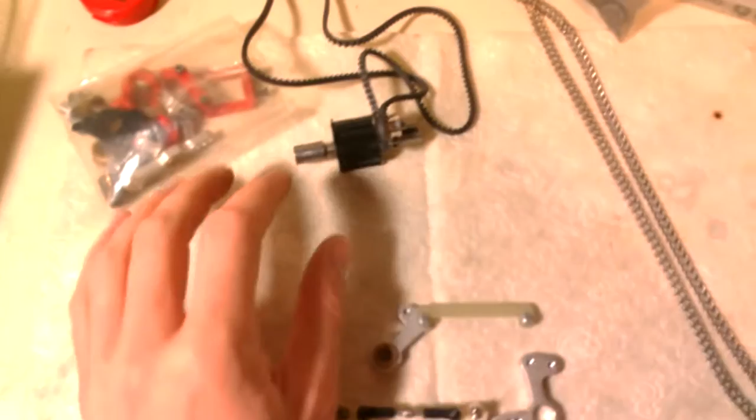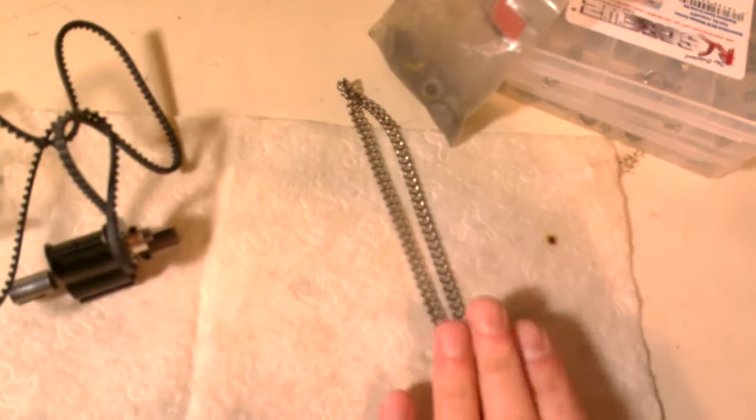As you can see, I have for the SP2 both the belt drive option and the chain drive option. I already did a belt drive conversion for the 410 Legend project, so what I'd like to do for this project is take the belt drive out and use the chain drive. The chain drive is much more rare anyway, so I figured it would be nice to do a build on that. I do have the parts for this—not just the chain, but also some extra sprockets that you use specifically for the chain drive. You just take out this little pulley here and mount those sprockets on, and you're good to go.

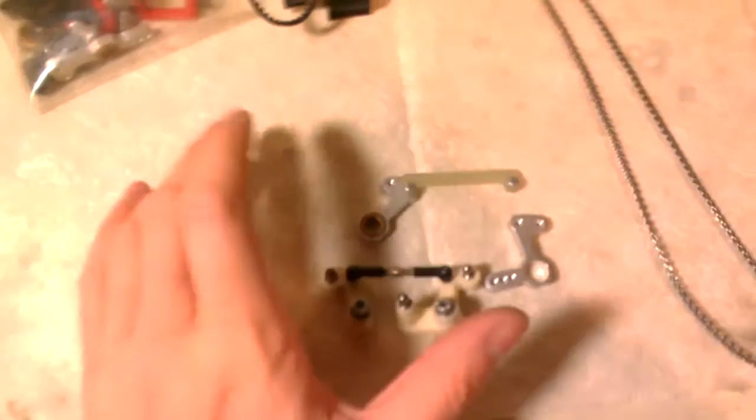So a few things to point out about the SP2 kit: this SP2 was released by MIP before the 410 Legend was released, and there were a few things they had you do to the chassis which were obviated with the 410 Legend. Let's see, actually I'll go to this right here.

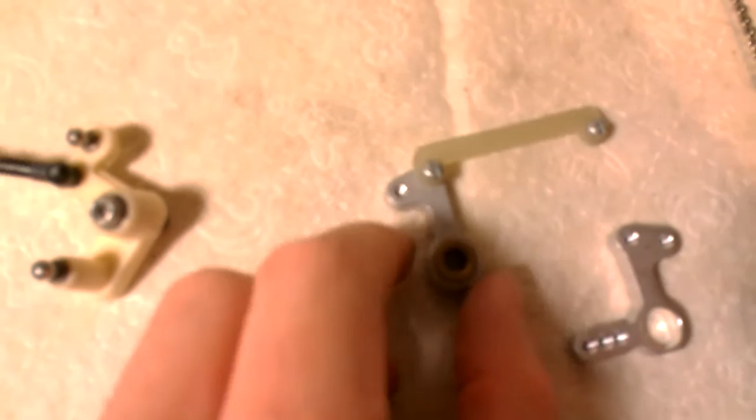One of the things they did is with the SP2, it was assumed you would keep the stock steering rack, which has a specific arm length extending out from where you mount the steering rack onto the little screws that go through the chassis. Because it kept that stock length, and because you're putting a gearbox on the front nose, you're reducing how much space you have left just for clearance for everything.

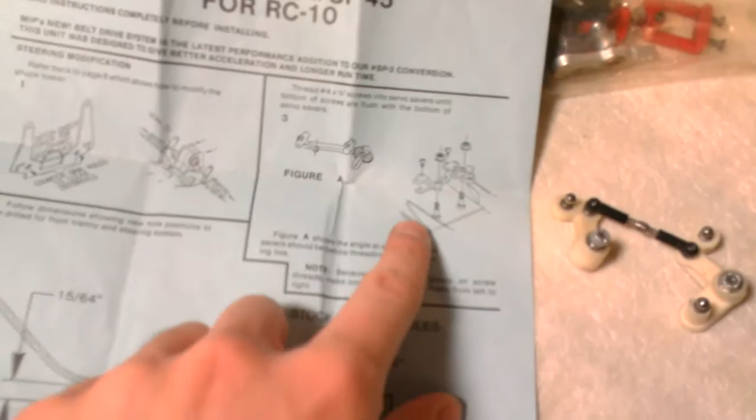So what they had you do was actually drill some holes that pull the steering rack back and spread it out a little bit, so that when you mount the gearbox, the steering rack can clear the gearbox. But now that you're pulling the steering rack back, you have to cut these sort of V-shaped openings in the chassis so that when the steering rack actually swings from side to side, it clears the chassis.

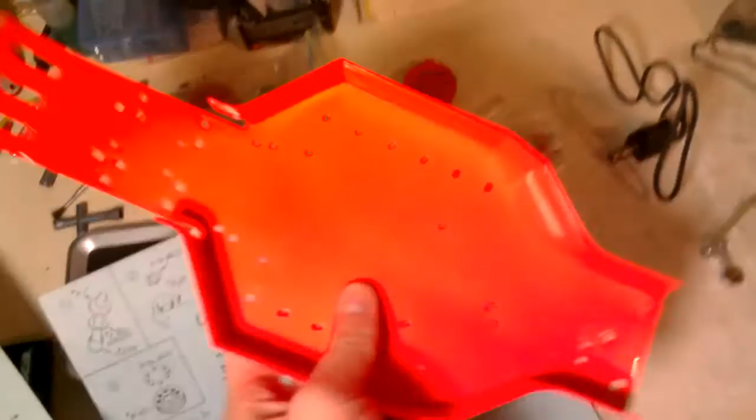And I would like to use this guy right here—this is like a hot orange colored chassis, powder coated for the RC10. I think this would be pretty cool to use with the chain drive conversion, and I'd like to find and use other parts that have nice matching colors to this.

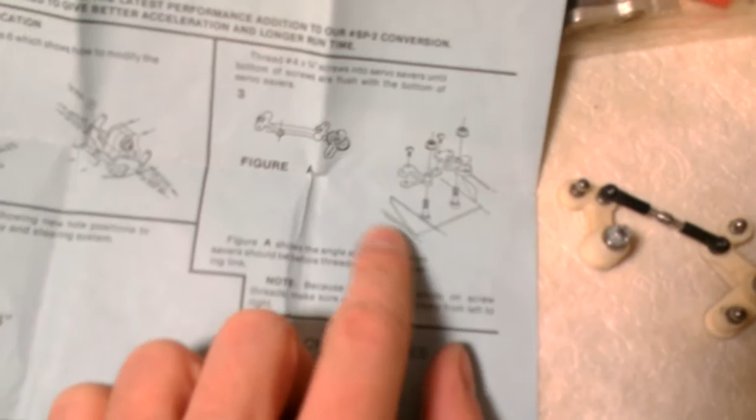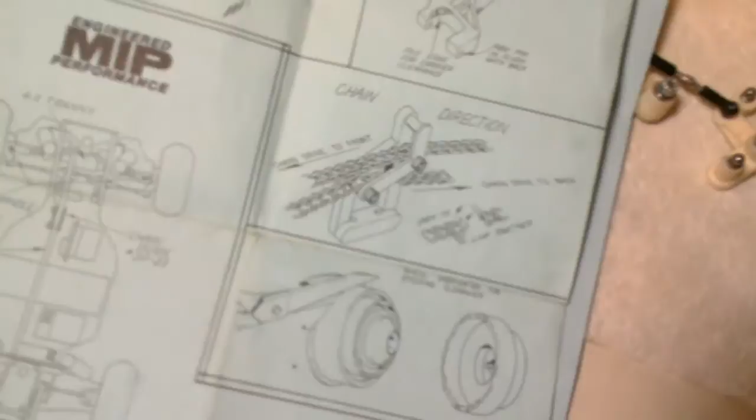But because that chassis is pretty uncommon, I don't want to have to hack it to bits to get this kit in place and drill these holes. The only holes I really anticipate drilling are these two right here, which you use to mount the tensioner that goes on the chassis. But other than that, I don't want to drill any other holes.

So what I'm thinking of, at least trying, is to use the steering rack from the 410 Legend. Because when the 410 Legend came out, they did not require you to drill any new holes in the chassis or adjust where the rack goes. They basically set up the way the front gearbox mounts and gave you a shorter steering rack so that everything clears without having to extend the nose or pull the steering rack back.

So I'd like to try this to see if it works with the SP2 kit. That way, again, I minimize any hacking I'd have to do to the aluminum chassis. We'll see how that goes—I'll test fit it, and if it doesn't work out, I'll have to use a different chassis.

I'll save that one for a different project. I have another World's Car chassis that I can cut up for this build if I absolutely need to. But that's just something to point out, to give you an idea of the difference in length here of the arm. If I just put these holes on top of each other, there's a slight difference—let me see if I can get this right here, where the ball stud actually mounts.

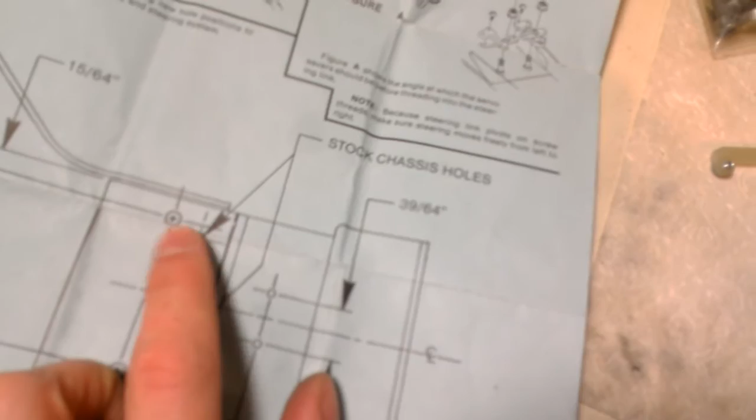So it's just a little bit further back, right? And if I put it on this arm here, it should be about the same type of offset. See, you can see the ball stud gets pulled back a little bit. Maybe this is comparable to the offset I have to use here, so I'll try it and we'll see how it goes.

Another thing to point out, with the 410 Legend kit, the front gearbox had a differential, but it wasn't a differential in the conventional sense. All it really was, was two one-way bearings, one for each of the left and right sides. So you didn't have a true differential, but for the SP2, it actually has a ball differential inside the front gearbox. In that respect, it's actually better than the Legend kit. I think that's kind of interesting.

So I'll have to take this apart, clean it up and everything, and put it back together. Another thing is, because I'm using the SP2 front gearbox, I thought it would be appropriate to get the SP1 rear gearbox that was made by MIP. So I found one of these on eBay, and I already took it apart for you just so you can see what it looks like on the inside.

It's kind of interesting, all the gears are metal. The diff gear is metal, the idler gear is metal, and the input gear is metal. And the diff out drives actually screw on with a little Allen key, or a grub screw. So you mount the gearbox, you put this onto the diff out drive, and you tighten down the grub screw, and that holds this in place. You do it for both sides. This whole assembly here is a metal gear.

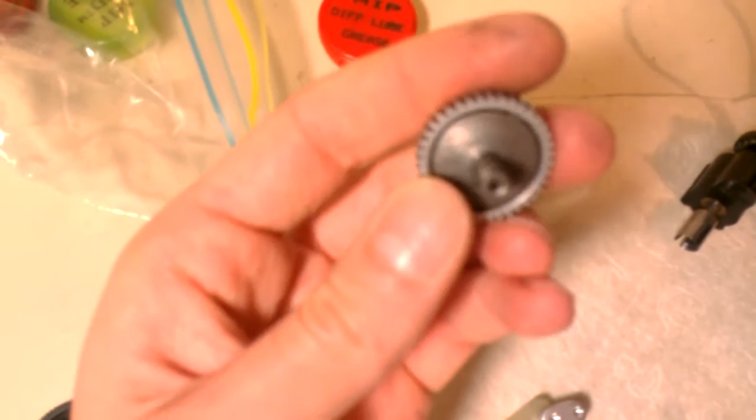So I do wonder, if you were to actually run this, it would probably be high maintenance. You'd have to take it apart quite often and make sure you lubricate all these metal joints. I wonder about the wear in the actual mounting points for the diff balls in here, if they would wear out inside the gear, because that's metal to metal contact as well. So I assume this was probably a high maintenance gearbox. But this is going to be a shelf queen, so it doesn't really matter to me.

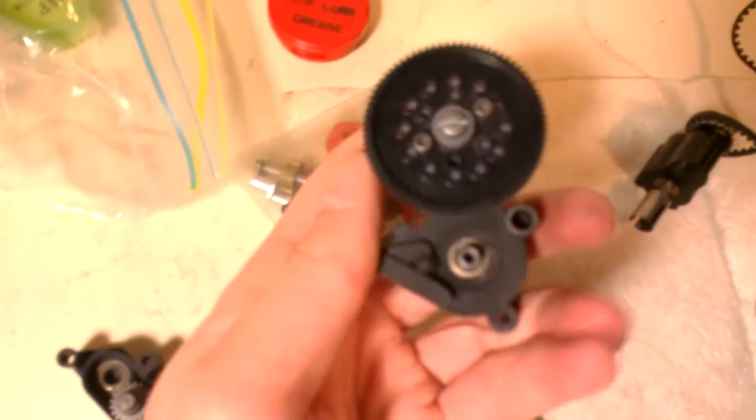And I thought it would be cool to make everything MIP as far as I can do that for the drivetrain. The only caveat to this is that this top shaft presently is not set up to take a slipper clutch. The top shaft is short, so even if I can mount an old RC10 slipper hub on the back here, there's not enough screw space to fit the other side of the slipper clutch and the spring and everything. I'm pretty sure there was a slipper clutch option sold for this gearbox, but they are incredibly hard to find. I thought about using maybe like an RC10 B4 top shaft for the input shaft here.

And then mounting a VTS slipper on it, which you can do for the standard stealth gearboxes. But for this, the actual input gear is a different size, so you cannot use the B4 input shaft here. It has to be this assembly as far as I can figure.

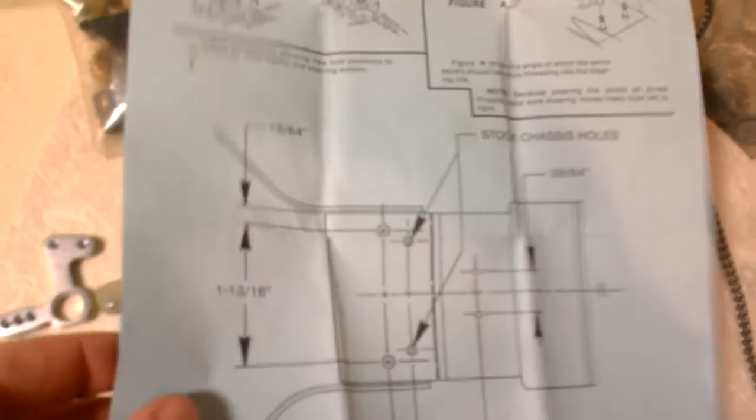So that's kind of where it is right now. The first things I plan on doing is cleaning this up, rebuilding the diff, and then doing the same for the front gearbox. And then after that, I will have to take a nose and drill these holes into some kind of front nose that I have, because this front gearbox mounts actually with 2 screws on the bottom. On the Legend, the gearbox kind of just hugged the front shock tower, but here you actually have to screw it to the front nose. So I'll start with those 2 holes, and then I'll mount that to the chassis.

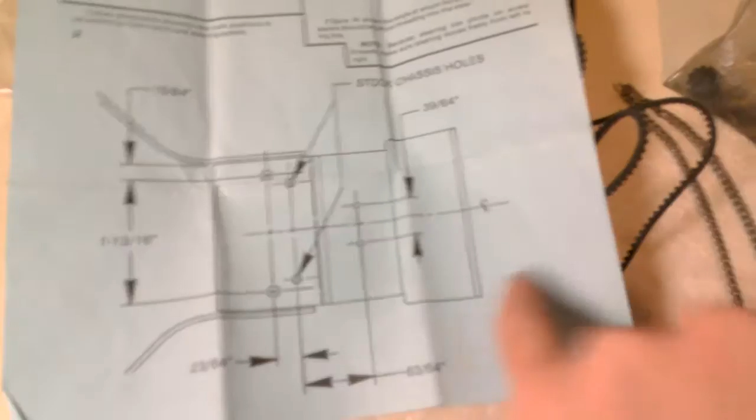And then I'll test fit the shorter 410 Legend steering rack, and I'll see if that works. If it works, then great. If not, then I'll have some more work to do.